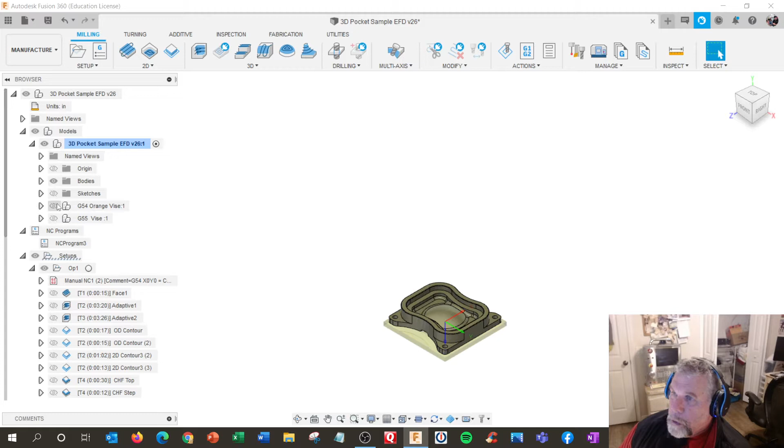And I just opened up my 3D Pocket sample. I was going to do Operation 2 and my vise is upside down. I think because my vise is viewable. Let me shut that off. Vise. There we go. It says G55 vise.

So if I click on Operation 2 to the right of the radio dot, because I have the sync view with active setup on, it flips over automatically into my isometric view, which is kind of like our home view, but I have it aligned for the setup.

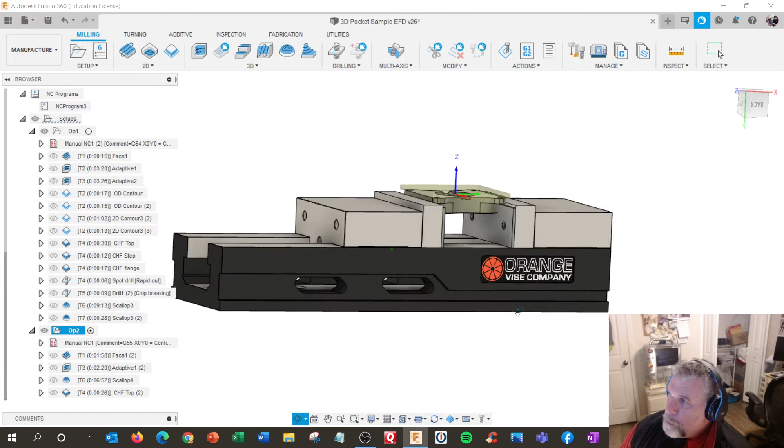So there's my vise. And I want to note that we turn this part 90 degrees because we want to be able to machine it without making soft jaws, because we have a nice flat surface here we can clamp on. And what we'll do is we're going to put a work stop on the corner.

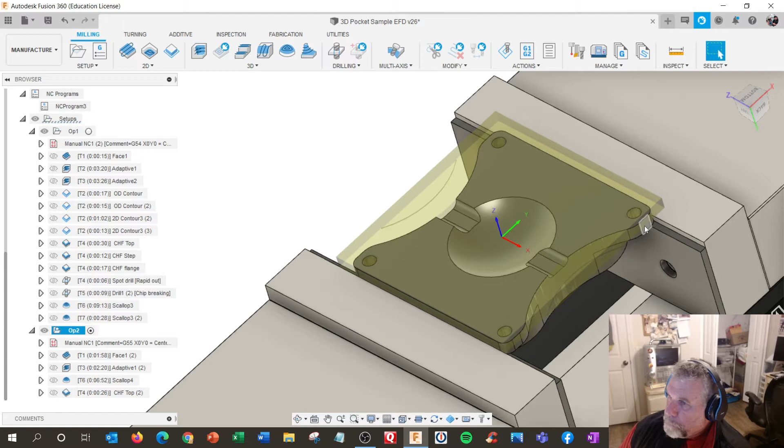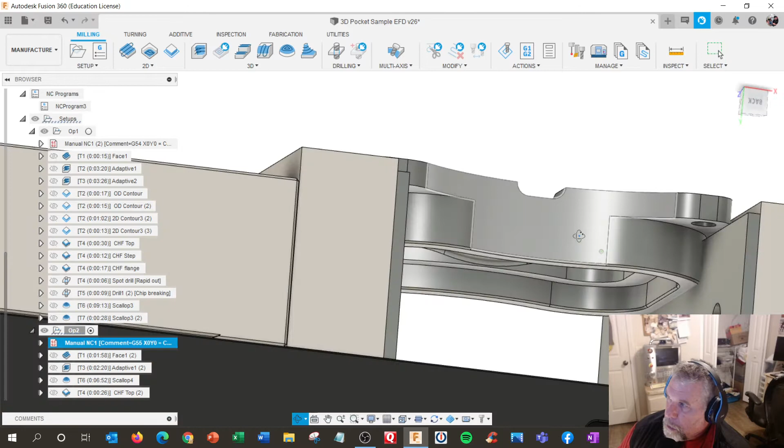And what did I write here for my note? This is my X0, Y0 equals center, and Z equals top. Top of part, meaning this. I have been writing some notes in there. I don't really have it sitting on the job, but that's where we're going to sit on there. We could sit on this.

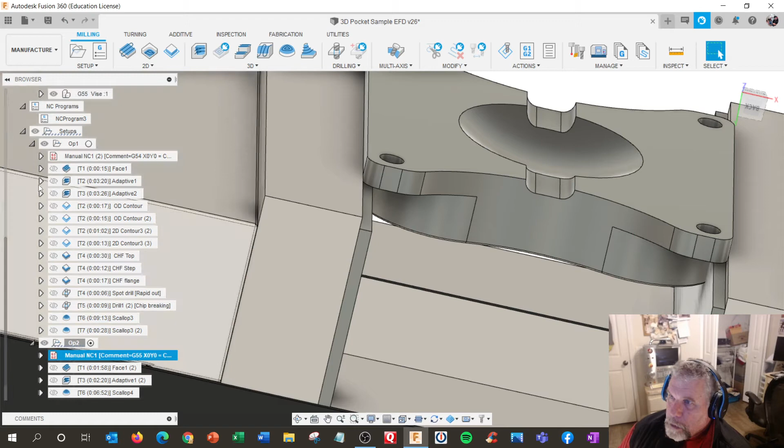Let me see here. Oh, no, we're going to sit on, let me turn off the vise. Getting confusing. Yeah, we have a big flat surface here. So we're going to sit right on the bottom of this. And we're going to use a work stop on this corner right there. So we could actually do the XYZ from there.

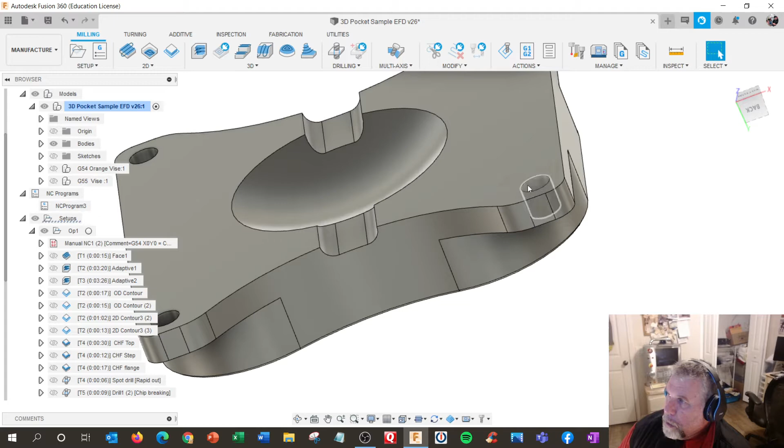And if we're sitting on the bottom, I would probe like a 1-2-3 block and shift it to whatever this height is. So let me just do a quick inspect. I probably should check my blueprint, but it's .750 tall. That's very achievable.

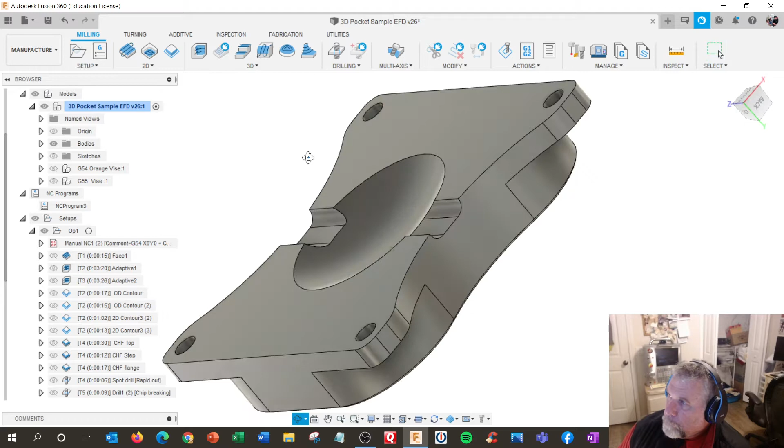Actually, let me change that, because we're going to use the 1-2-3 block to find the corner, and we'd have to do math to get it to the center. Well, I'm sorry, that was Operation 1. So Operation 2, I'm going to change that. I had it to center, which required us to shift it by some blueprint numbers. I'm going to move that to model.

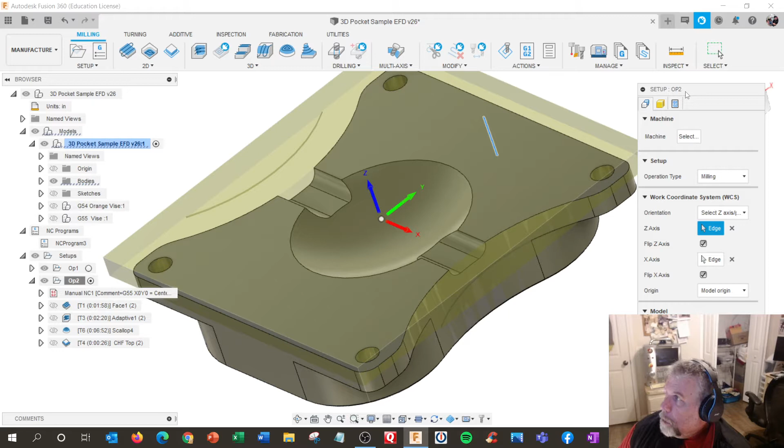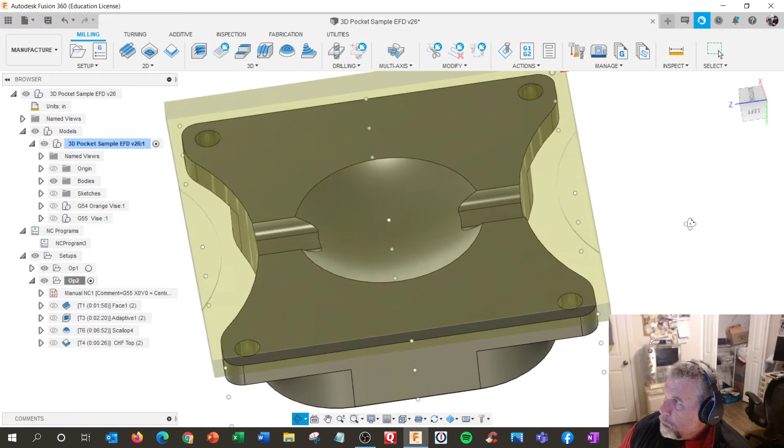Oops. Where am I here? Here we are. Nope, wrong one. Origin. Model box point. Let me see if I can align this. Move this out of the way. I would like it right there. Yeah, that would work. I think that's going to be better.

I had done it before, but we got to remember to turn it 90 degrees when you flip your model over. We're not just rotating it 180. We're rotating it 180 and then rotating it in the Z-axis 90 degrees. Okay, because I did that, these will probably all update. So I'm going to go over the operations.

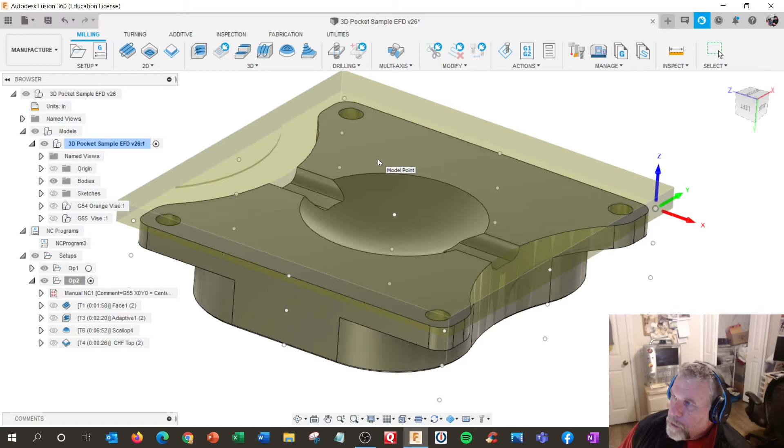We need to face mill the top. We need to 3D mill this cup here and this groove. And we need to rough it out. So we're going to face the top, multiple levels. We're going to adaptive machine this area out. Then we're going to use the Scallop program to finish the 3D layer, and then we're going to chamfer the top. All right. I'm kind of going to do this backwards because I'll just show you what I did.

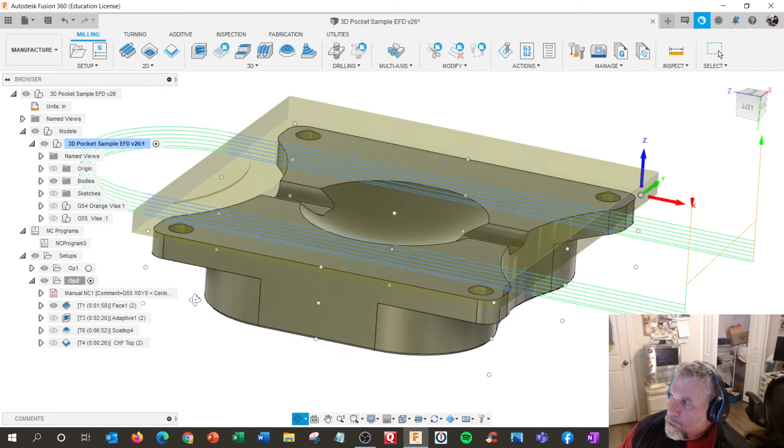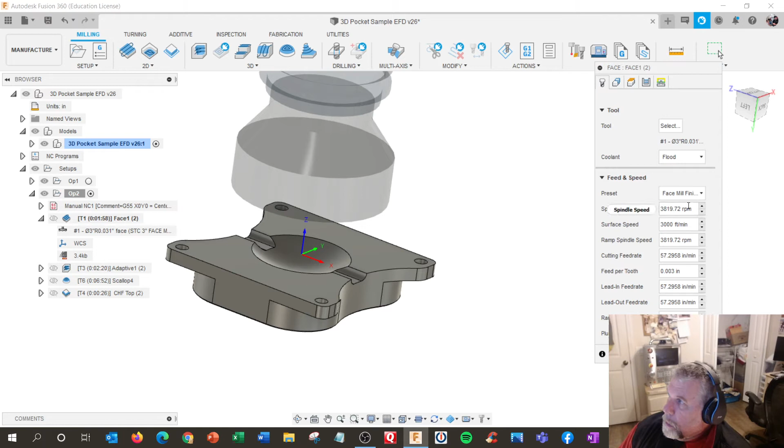So now this is the multiple cuts, so you can copy the existing program up here, the face mill, and duplicate it and bring it down here because all your feeds and speeds will be set. And let me just hit cancel here. We'll go edit. We got our face mill specs on there, geometry, stock selection, and we want to use all stock settings so it identifies the extra material.

And then we're going to do multiple passes, multiple depths. And I have this set so the finishing step is going to be separate with a separate feed rate. And I have direction both ways. And no pass extension.

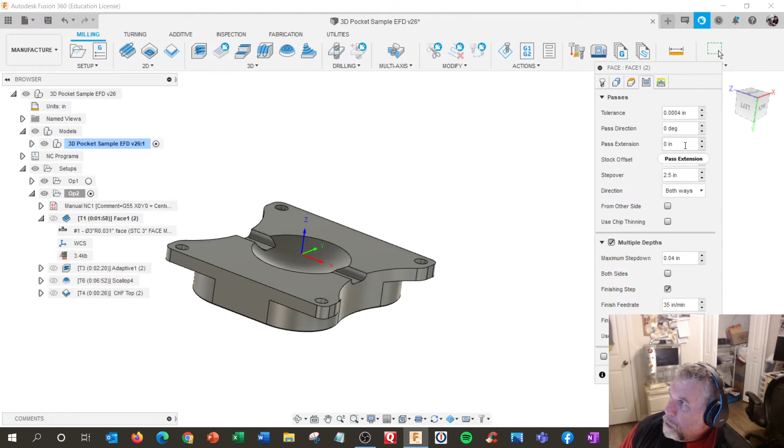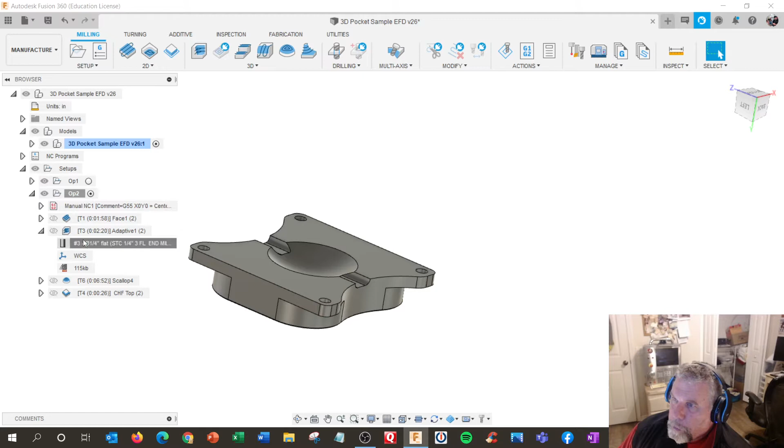Okay, hit OK. And I actually turn off the curves up and down. So, all right, that's typical face milling. Then we're going to go adaptive. We're going to use the 1/4 inch smaller tool here. And it's going to be 3D adaptive, but adaptive is trying to do everything, so we need to control it.

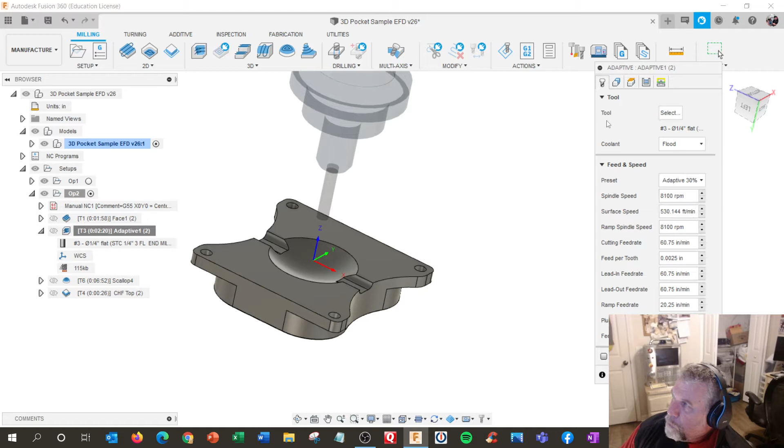So let's edit that program. I'm using my adaptive 30% settings. I'm using my feed and speed presets for our Haas VF2. And right now we're going to use selection chain. We're going to chain this area here. We had to play; we did tool inside boundary. We selected this chain. And we used rest machining so it wouldn't try to do everything else.

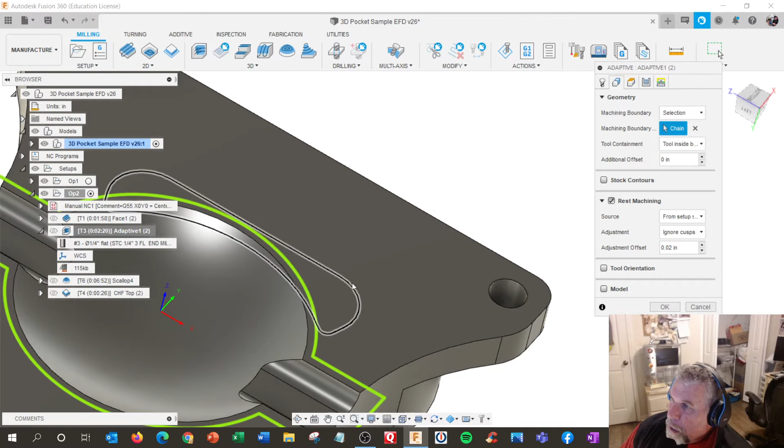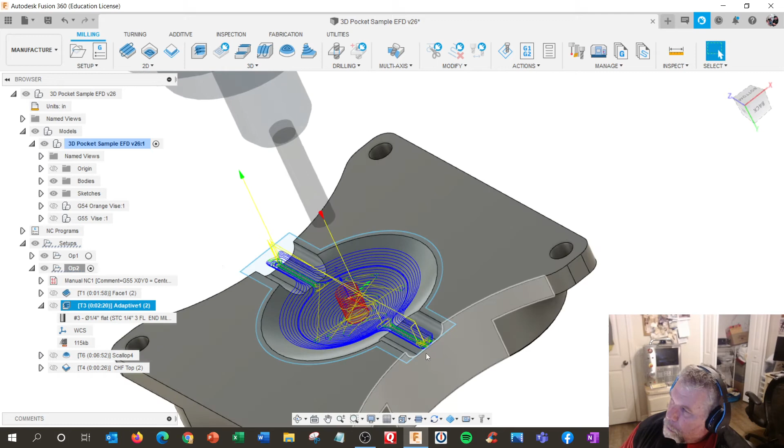So how did we do that? How do we make the chain? Sketches. Hold on a second. Okay, so what we did is I made a sketch to keep it as a boundary. I didn't really need to be too exact, but I had to play with it in order to get it to stay inside. I could have used some of these existing links here, but I just did a circle and made a box. So I just made a little containment area. That gave me the ability to stay inside this boundary. I made my own boundary.

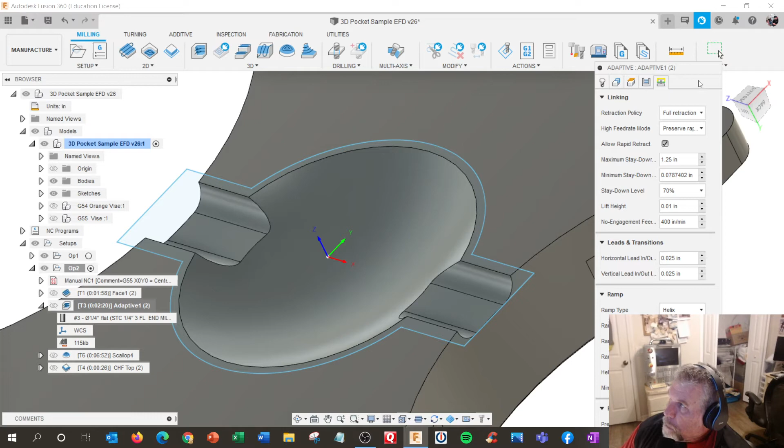You can play around with these other numbers, but we're doing tool inside. Let's get down to passes. Got stock to leave, 20 and 20. Our feed and speed settings have done 30% on the optimal load. That takes care of that. And the fine step down, we actually made this a smaller number so it could get close to the curve. We're using the 70% stay down, 10 thou micro lift with 400 engagement. Not really as important in this, but get in the habit of doing that. We're doing a helical entry there. So let me hit OK.

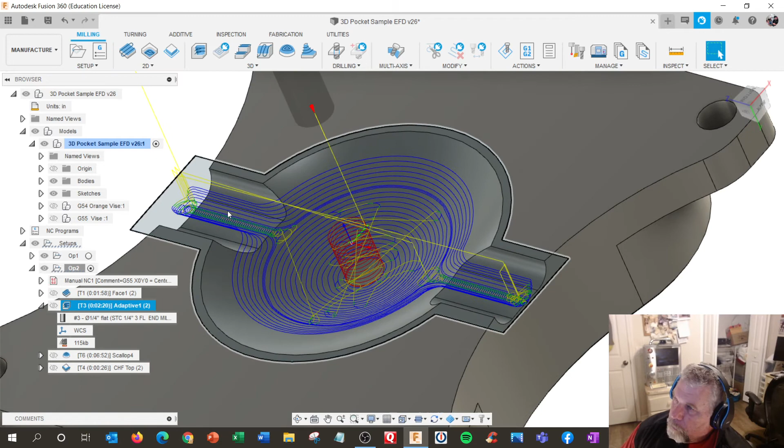So there's our roughing. It's roughing in there, and it's actually working from the bottom and stepping up. Those 25 thousandths give you more control of getting close to the curve. And you notice it's making these nice little swoopy moves in here versus plowing like a slot. Then we're going to go back, copy the scallop, duplicate it, and use the same boundary to keep it inside.

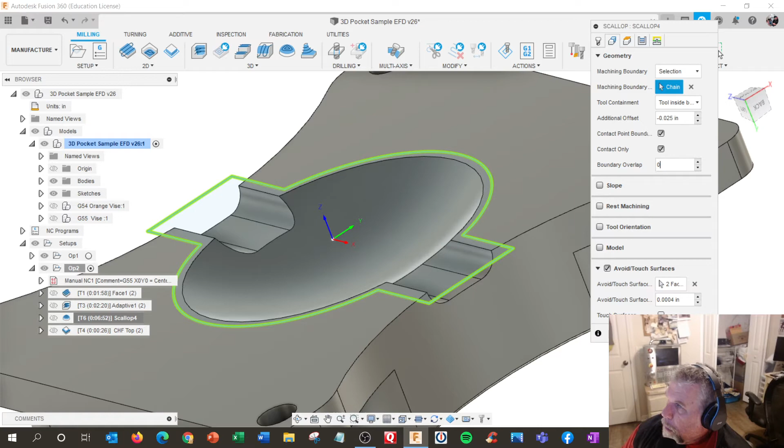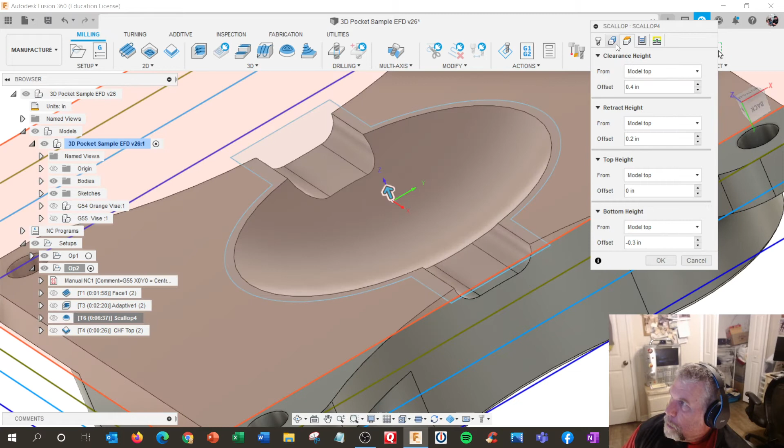All right, let's check the settings on that one. We got our 3/16 ball mill using the same chain, and we did an additional offset of minus 0.025 with a boundary overlap. If you hover over that, you can let it read. I'm going to copy this number so I don't forget. Let me put it on 0. Hit OK. We let it regenerate, and notice it's doing it correctly, but it's kind of flopping up and over here. These are the kind of settings you can experiment with to see how it comes out. So I'm going to put 0.025. I'll try that one.

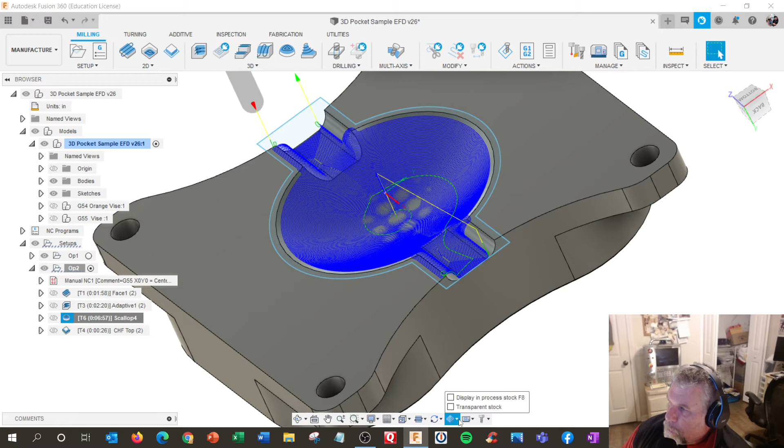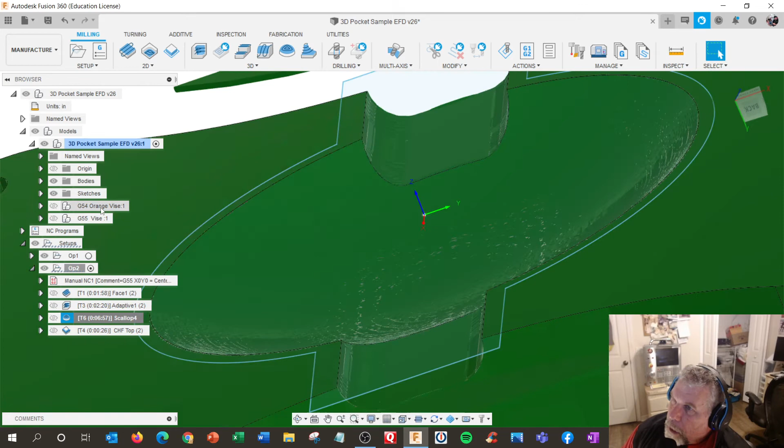And if you turn on the stock visibility and then shut off the tool path, it's a lot of settings, but you can see what it's going to look like without having to generate. And then if you want to get really good, you just shut that off, and that's really just the stock by itself. So I'm going to say that looks fine. I'm going to turn the model back on, turn the cutting path back on, and shut off the display in-process stock. Okay.

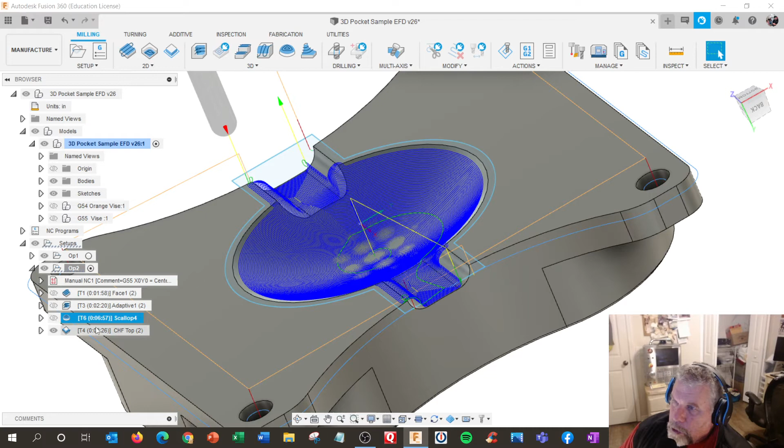And the last thing we're going to do is chamfering. Hit edit. We get our chamfer preset in there using the chamfer tool. We wanted to chamfer the holes and chamfer all this area. So we had to do a partial here. We couldn't really get down in this area here. Let me shut some of those sketches off. Okay.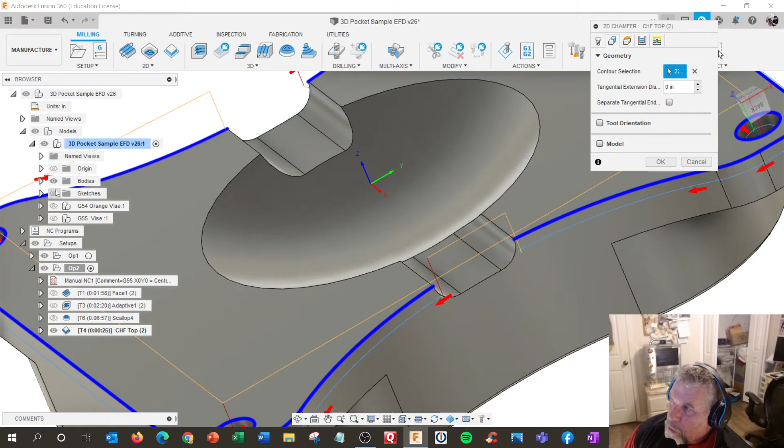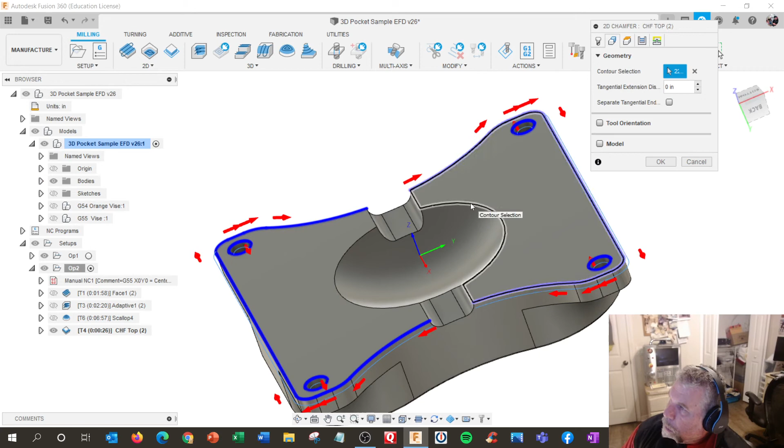Let me shut off some of the links and leads there. So that's toolpath only. All right, so we get most of it. We decide we're just going to hand deburr this section, and we're not chamfering up here. And that's pretty much it. And our time on that is 12 minutes.

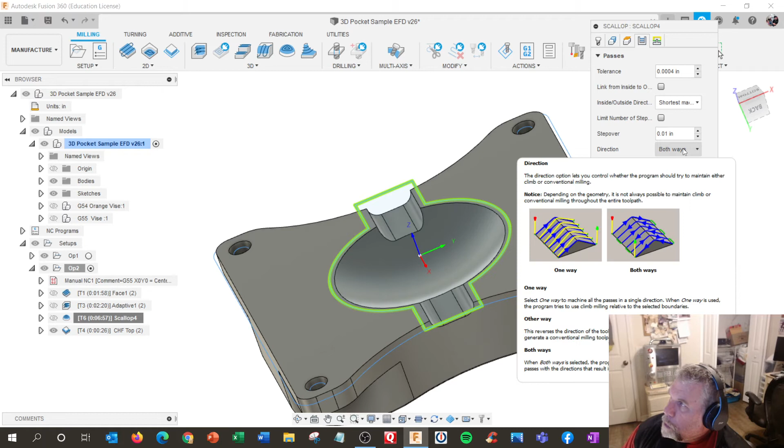So let's check our settings in this one. We got 2 minutes on the adaptive and 6 minutes on the scallop. We'll check the settings on that. We have 10 thou step over, smoothing's activated. We're doing both ways machining, and pretty much how it looks is going to determine your feed rate. So let's make sure we're doing the same feed as the first side. It's 3 thou per tooth there at 8100.

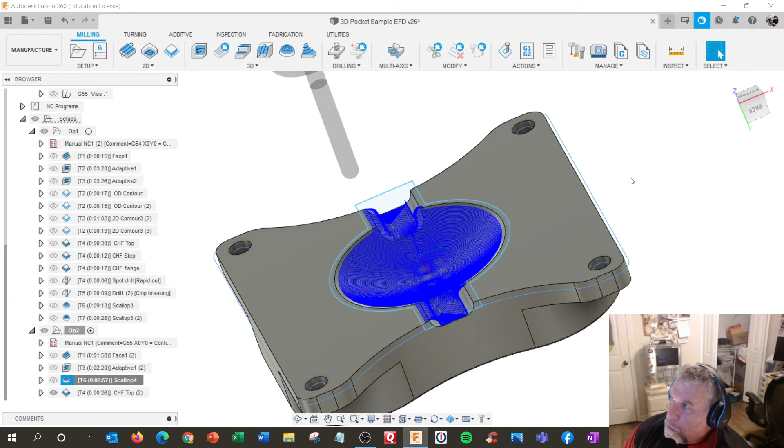So edit, and this is 2 thou. Let's upgrade that one, 3 thou per tooth, and that cuts some time off there. You can start upgrading your settings depending on how the surface finish looks.

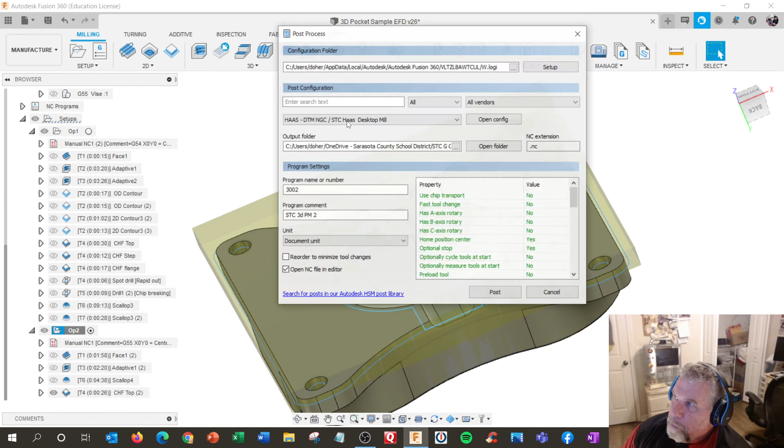All right, post the code. This is the old way of posting with the legacy style. So I have my program numbered, got my comment, line numbered, open NC file, and I did not choose machine. I'm trying to get into doing this more and more. If you have a machine set up and we're using the VF2, I hit select,

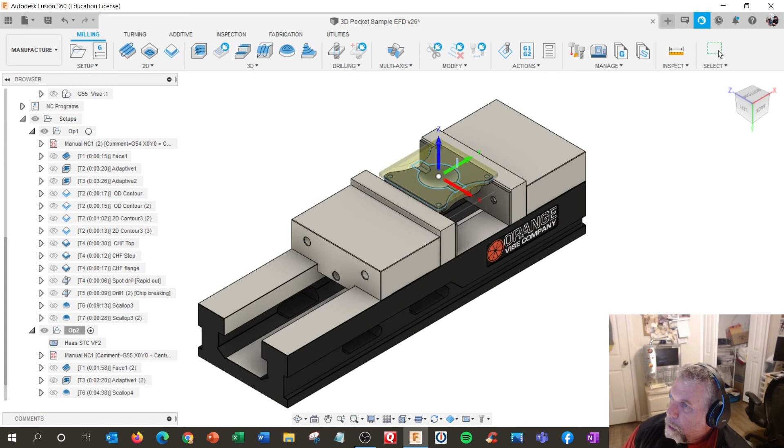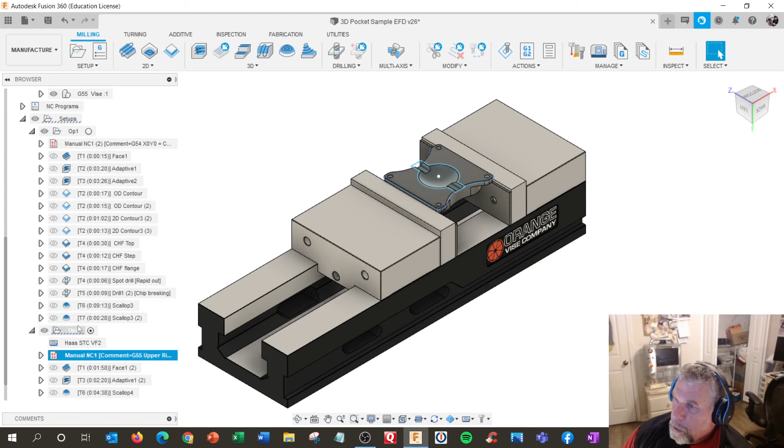and then when I go to post, let me change my comment here. This is no longer, I'm going to call this one upper, and Z0 equals top, plus 0.750 up. And that should be enough information to get the setup.

Now if we're posting an open NC file and editor, I'm going to post this code in the VF2, make a new folder so I can do this later. Hit save. Review the code. So I got it labeled correctly. I'm using the G55. The machine's been identified. I'm using tool 1, 3, 4, and 6 from operation 2. There's a note right here for setup information and a setup sheet, which I'll also print out.

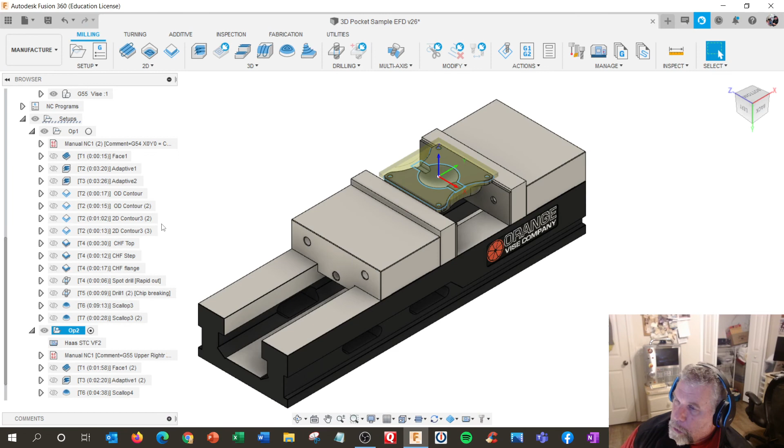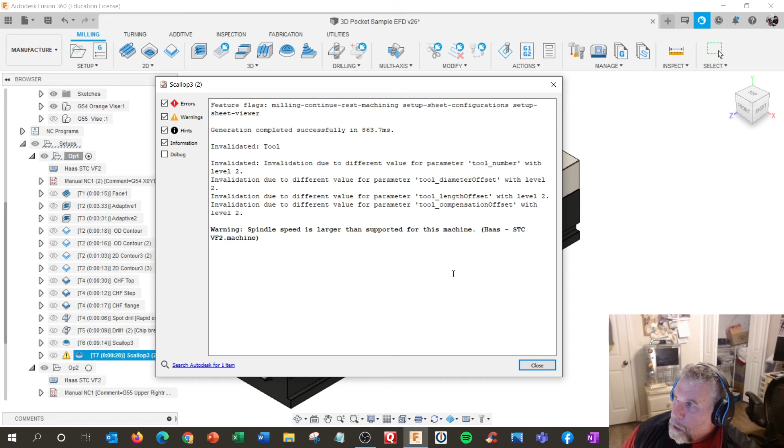And we're using G55. Now, if we were to do this actually as 2 vices, we could edit this one. I'm going to make sure it's the same machine setup. VF2, hit select, and make sure we have WCS 2 labeled. And this is the legacy way of doing it. Well, what's this thing say here? Oh, spindle speed is larger than for supported machine. Let me go take a look at that. Oh, 8100, it is a little bit higher. I just want to make sure it wasn't like 12,000 RPM.

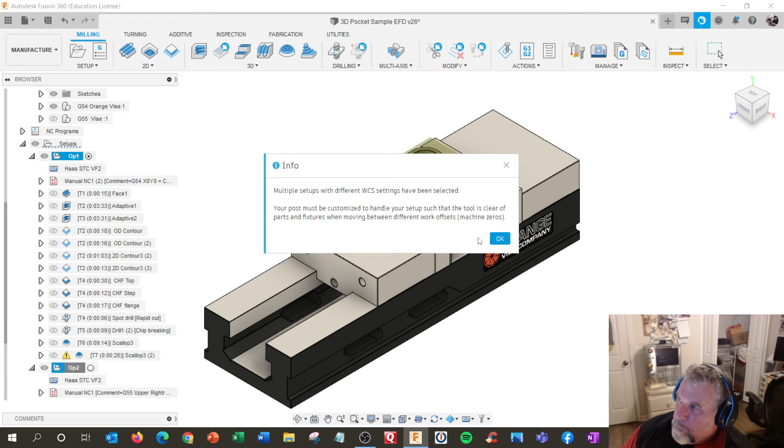All right, you would hold and then select both, post. It just gives you not a warning, but info that you have multiple. And to make it really efficient, we can reorder to minimize tool changes. And it becomes all program 3001. And I got all my tools listed. I have actually both of my setups listed, oh, that's pretty cool.

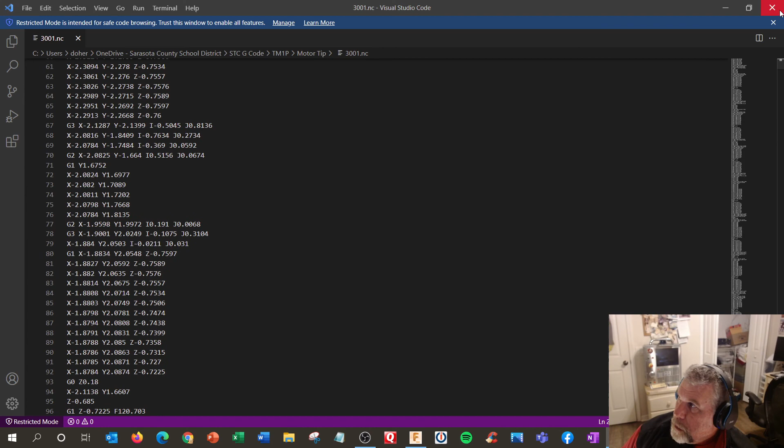This is face mill one side, adaptive. I'm assuming it should have done face mill, first side, second side. So let me make sure I had both selected. So I got face mill, face mill. So that should have reordered. Let me post that again. Hit OK, reorder to minimize, post, save.

You have 15 minutes left of computer time. Oh, getting kicked off again.

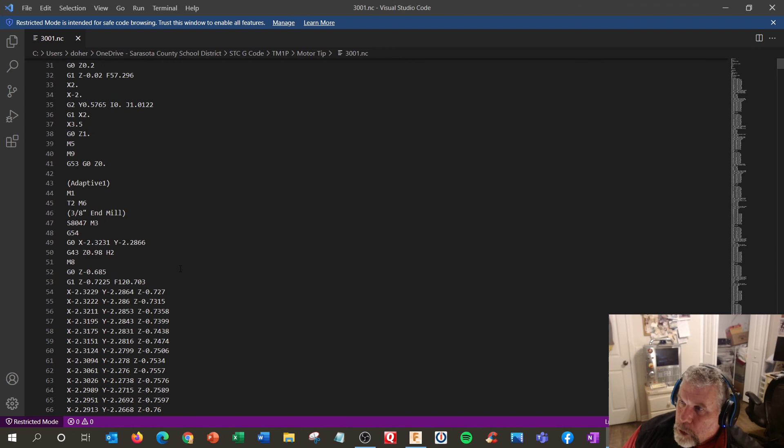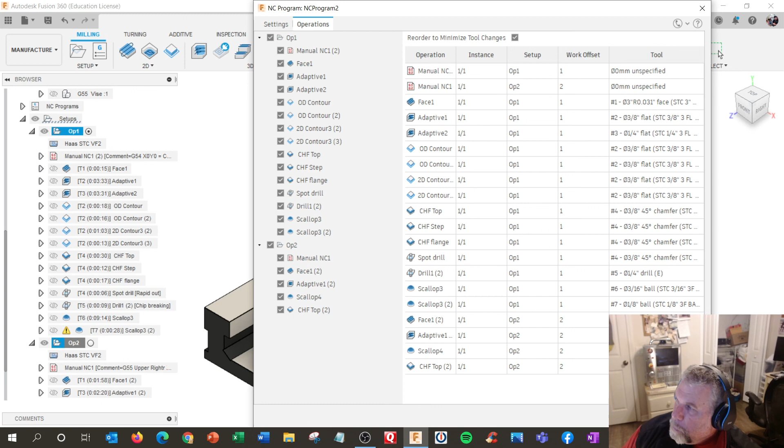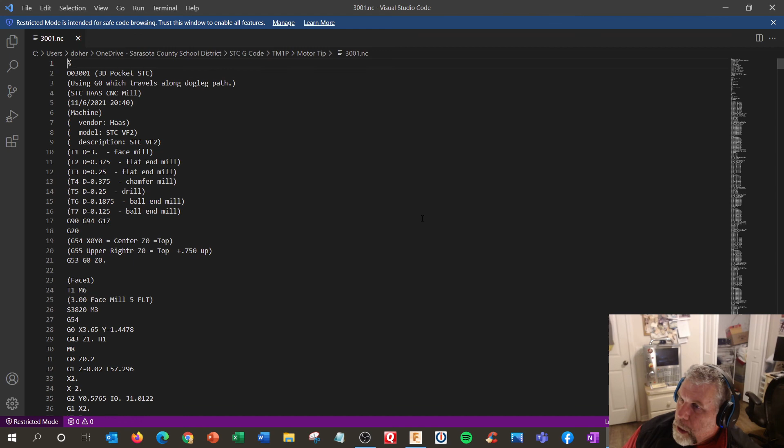Well, I guess it didn't choose that. Okay. Let me try the newer way with the NC program method. So this one is machine selected, open NC file. I'm not posting to the team. Operations, everything's selected, and reorder to minimize is selected. So maybe it's those manual NC codes that are triggering it, but not a big deal. So this is the same method. And same result. That's fine with me.

Now, if we were to repost again, what's this say? Warnings. I don't know why it says multiple. All right. So that happens if you go back and use the post, you end up with multiples here. So if you end up changing something, make sure if you're in an NC program to go back and post through here so you don't end up with a pile of them. But other than that, that pretty much takes care of that.